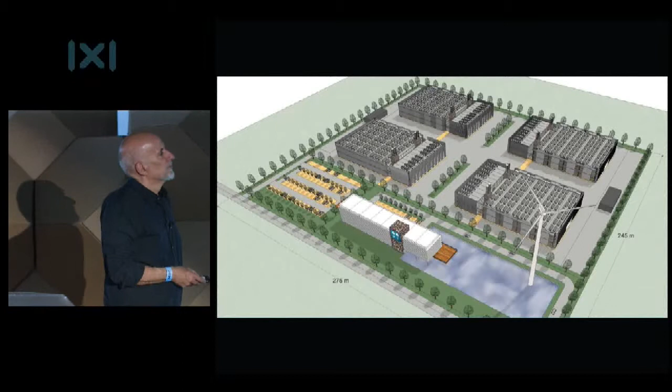This was the point of departure. That was the project made by Royal Haskoning, a Dutch design company. And this is a kind of common project - they are very used to doing projects for data centers. These are the IT buildings, 4, with 2 main levels, and the side spaces to give energy, let's say, to the main areas, and here the support building.

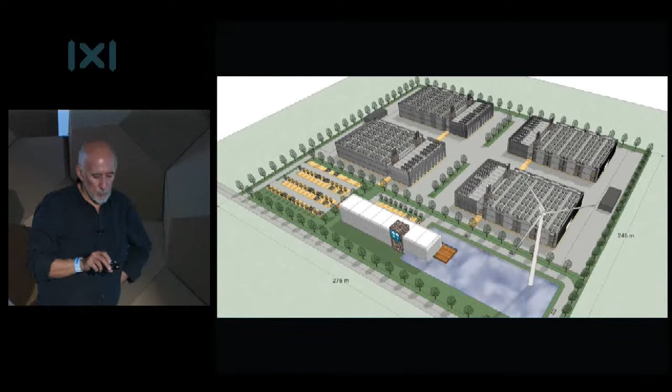This presentation of these first studies was very useful and very interesting for me, because from here I began to think about what I can do with this kind of brief, with this kind of program and the problems in the site that was given.

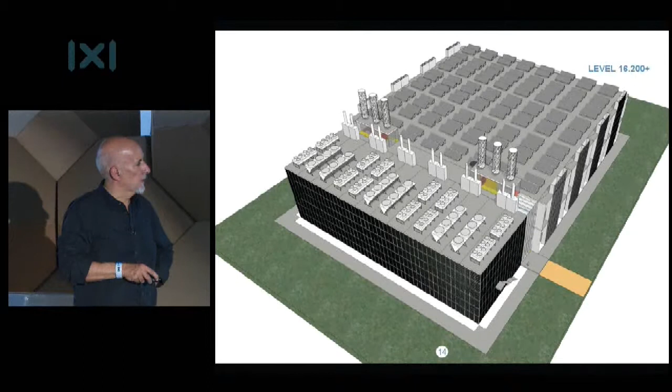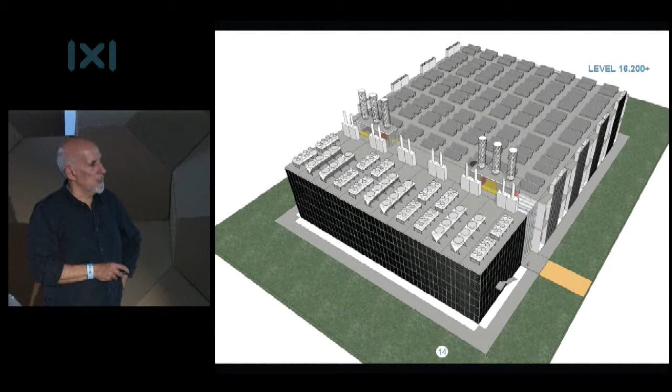You can imagine that we are not seeing things very interesting from the architectonic point of view, and they were aware of this, but this was a presentation. I was present in a workshop where they presented these studies to PT, and it was very, very useful for me.

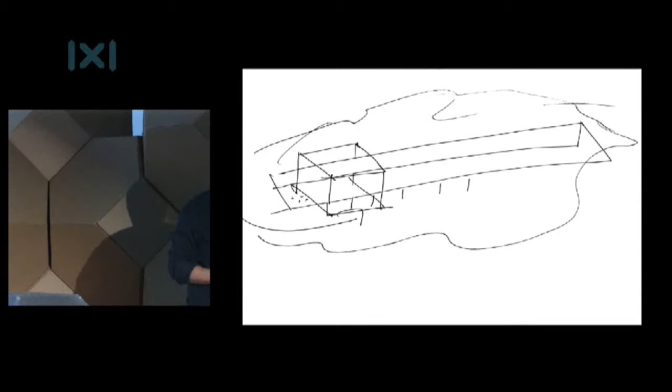I thought that it was interesting to imagine that the IT buildings were more compact than what you have seen. And I imagined several levels to create a kind of capacity that is always very economic.

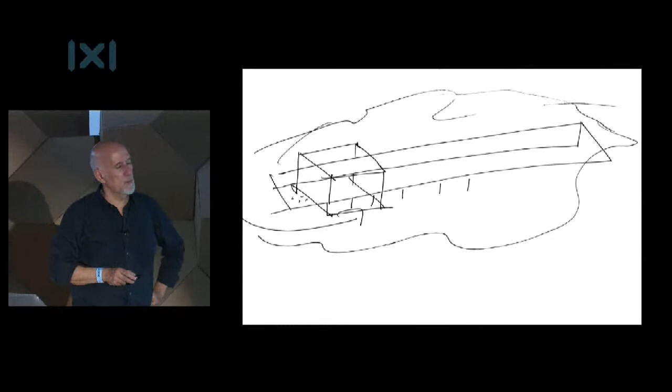And I thought that it was interesting to have the building directly built upon the earth, but to surround it with a very big area of water. The water is very important in this project.

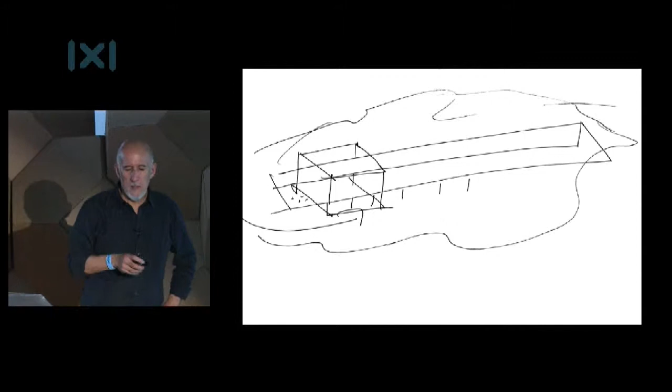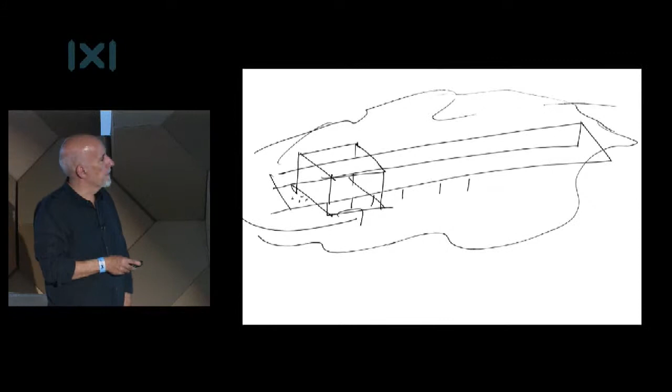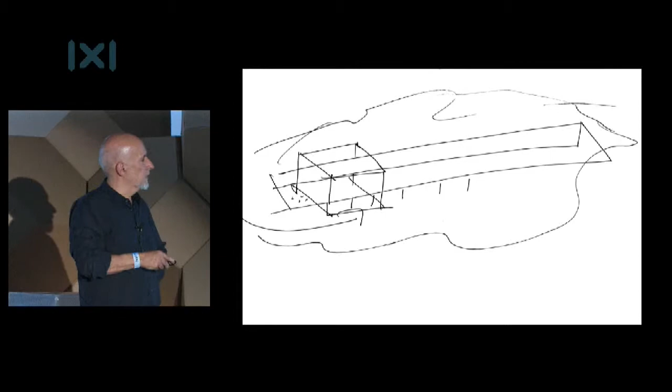The project for a data center is mainly a project for a system to create, in security, the access to a very great amount of energy, electric power, and after, inside the buildings, to dissipate the calories that are created by the work of the computers. And the water is very interesting and very useful because we use it for air conditioning and also to create a kind of interesting space that you are going to see a little bit.

So I thought that it was maybe possible to have this level of water surrounding the IT buildings that are built upon the earth, and then to have the office buildings with the view to the water and to the mountain.

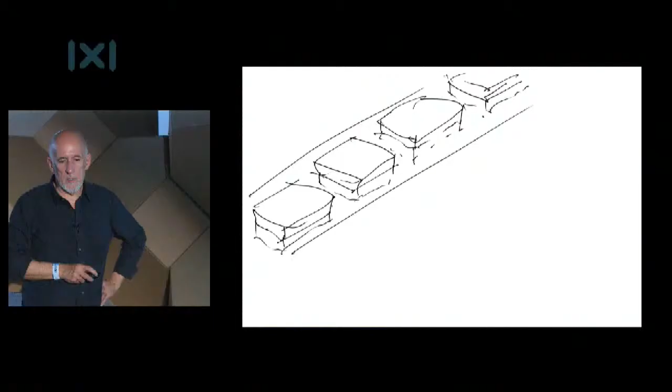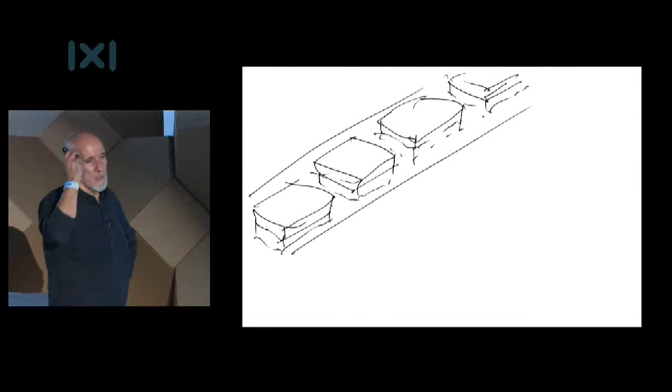And these were my first sketches on this project. I began to think that if I have the water and the building, the building is going to reflect on the water, and we can work with the dimensions we are creating and with the peculiar image that we create with the water and the apparent opposition between a very strong need of power and also the presence of water.

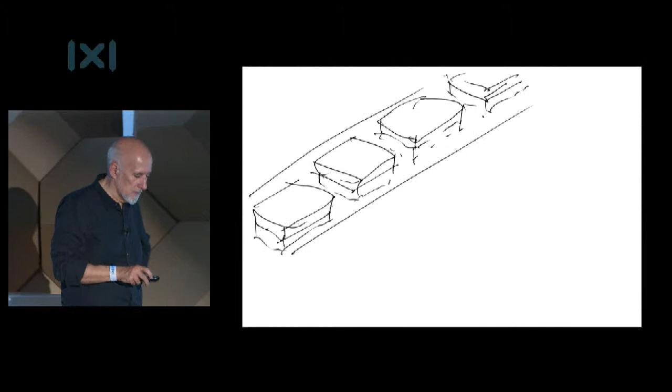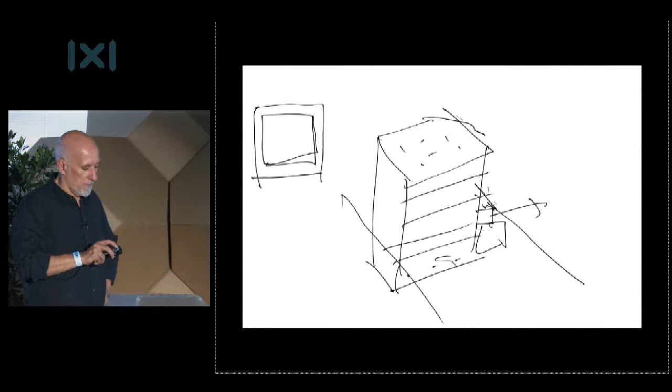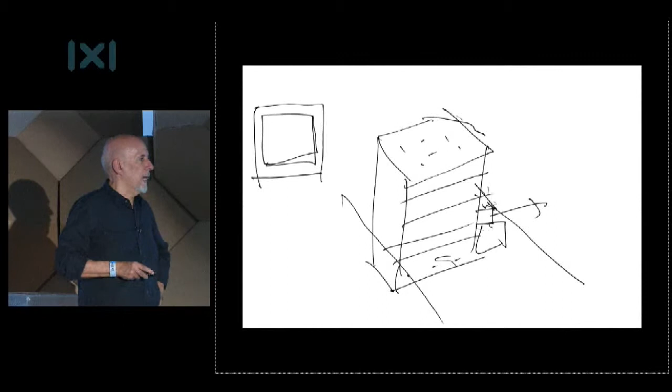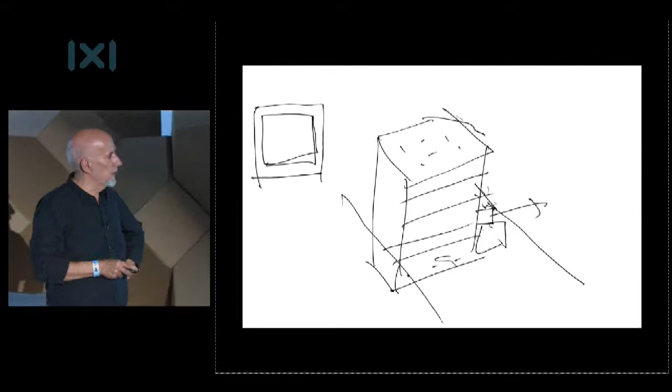This is another sketch, always thinking that we can have a kind of core inside, and then we can have spaces that work around this inner core. And the question that we have to have access very, very freely to let the air pass through the spaces that are overheated with the working computers.

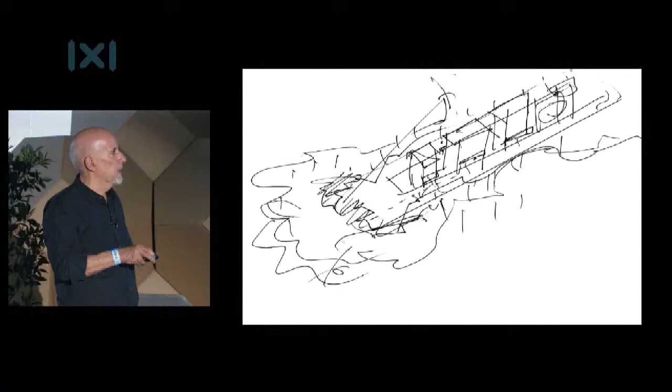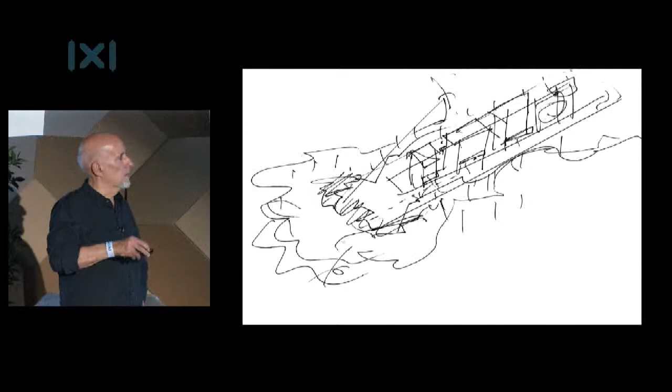This is a more complex sketch, but very near of the final result, where we can see the water around the 4 buildings. This is not easy - around the 4 buildings. Here a kind of indication of the position for the support building, for the offices, with view both to the trees that surround the building, the complex, and also to the mountain, and to the city, and of course to the water.

And this idea of having a very simple, let's say, result with simple buildings and everything that is complicated under the water.

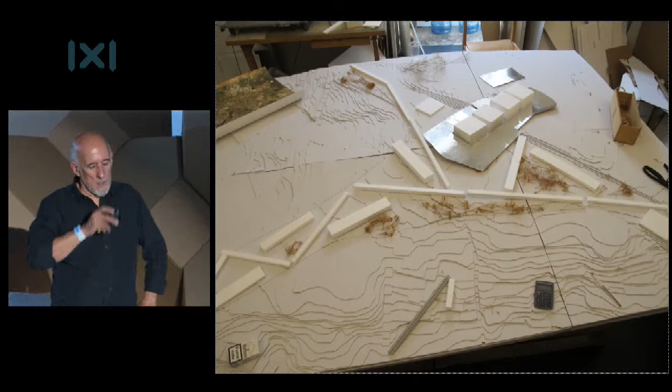This is one of the first models to try to understand what it could result with the space of the little airport and the other spaces around, and the complex here with the view to the mountain.

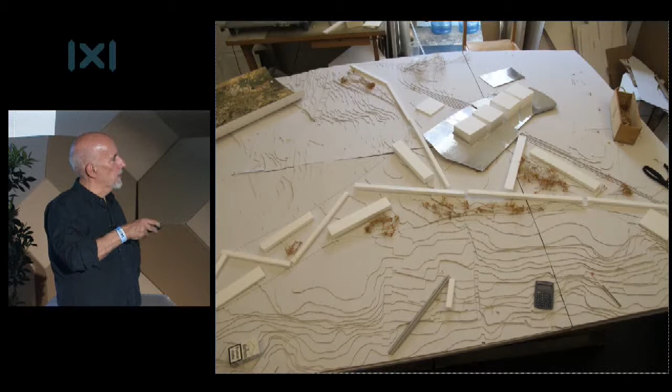I work very often with this kind of models that are not at all precise, but where I put everything I have around to try to - this is the road and the other buildings that we have to consider, like a hotel, research buildings, universities, things like that. And everything inside a kind of green park that surrounds all this space and occupies the space of the little airport.

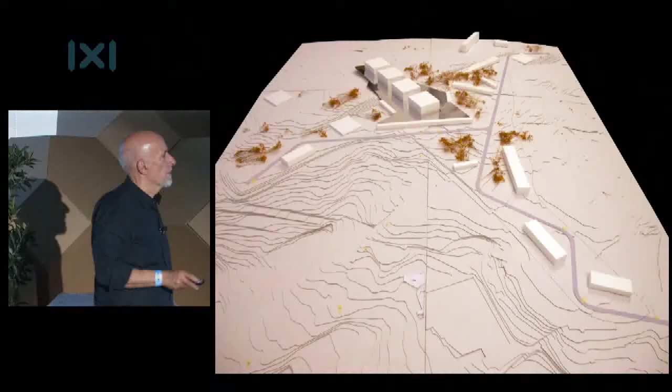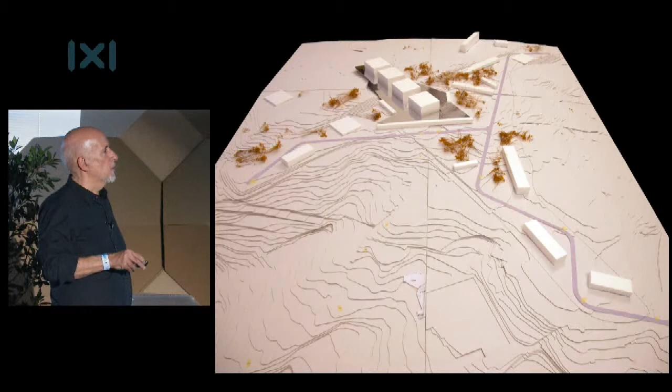This is another version of the first model. Here we see more linear the space of the offices that changed after. The trees that seems to be very useful in this space to create this kind of campus atmosphere with a very big concentration.

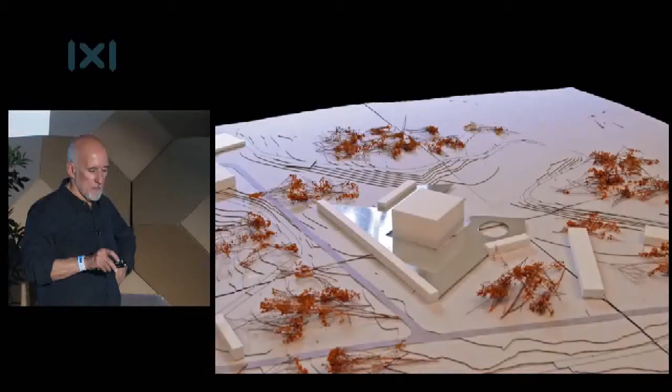This is a prefiguration of the first module. If we only build the support building and only one of the buildings, to understand that is the situation now. Now we have more or less this with the different form. But we were trying to evaluate if the result was possible, and it was considered possible because we create a kind of facade towards the entrance, and we can after go on in this direction, like this, with 2 modules, or 3, or 4.

We thought from the beginning that it was interesting to have a system, a metallic system that allows the air to pass in a great volume and speed. And we researched for some possible references.

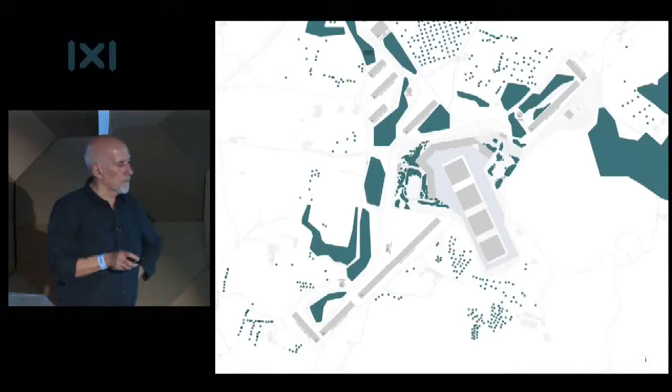This is a photo montage with the building, the area of the airport, and the area that is considered to study around this space. In green you see the water. The office building and the water.

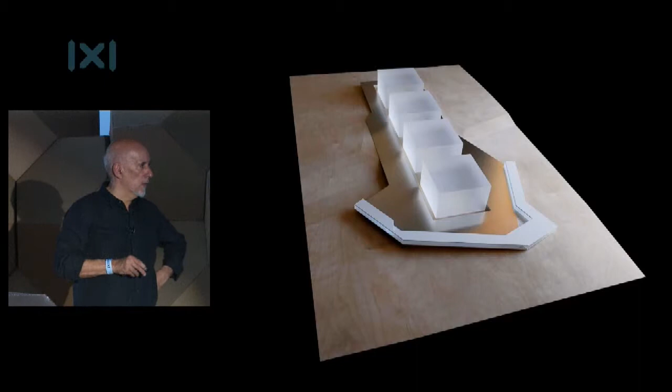This model is much more precise. The dimensions are very similar to the result. We have 55 meters a square, and the height from here to the water is 27 meters, more or less. So when we have the reflection on the water, we have a cubic form.

This is not so important, but for us is a kind of reference. And then we can see the office building that looks to the mountain and the city, and also to the water. Here is the entrance we are going to see with more detail.

Another photograph of the same model. Under the water, we have a kind of factory ambience, and the trucks goes and can circulate around the technical buildings.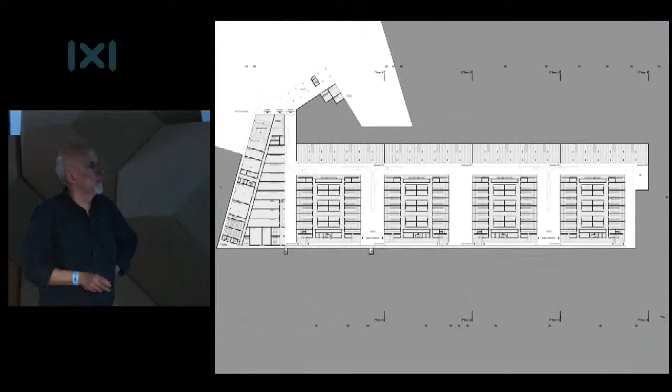And here you have an image of the ground level under the water with these - how can I say - generators, electricity generators, and lots of technical devices and the technical spaces, the technical entrance, and then the trucks circulate in this area, and we are always under the water.

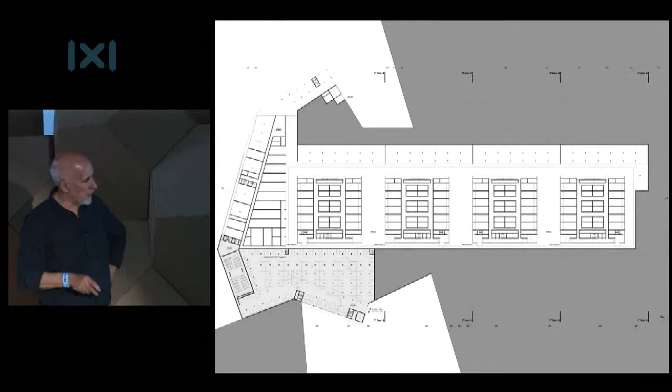More or less the same level, but with the parking area, with the entrance from here. And this is one of the standard levels with the entrance. You have a view to the water and to the building.

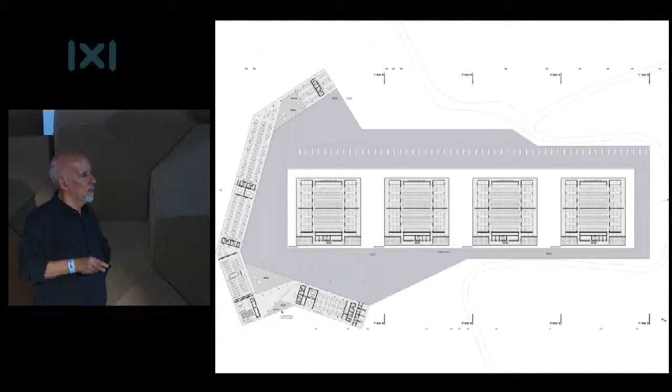You have the office areas, both sides. And here you have the technical buildings with the core, with the computers, the IT rooms.

What I tried to add to the project that we have seen before is to incorporate the site and the possibilities that the site was giving us in a climatic sense, and atmosphere, views, etc.

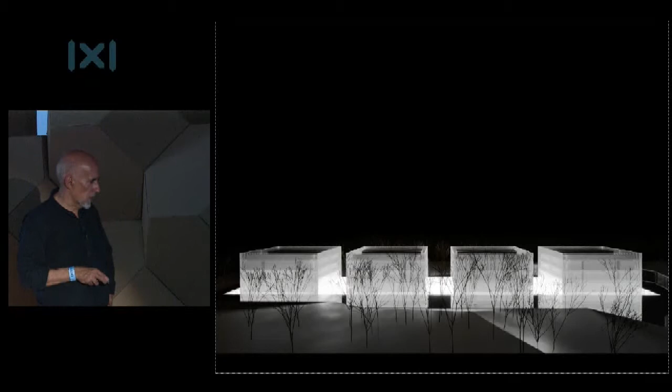This is another model, more detailed, with the water and the reflection of the technical buildings. This is a...

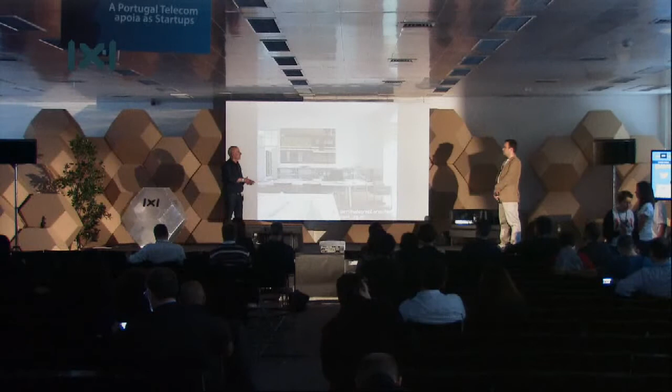So what has been the national, international feedback regarding the data center architecture specifically? During the design and the construction, I have not very much shown the project because they wanted a certain confidentiality. And now that it is inaugurated very recently, we are waiting for next week to do the first good photographs and to begin publishing the building.

For the architects, the reception is always very good because we like to introduce a kind of humanity in these very huge and difficult briefs. And for me, it was very interesting. I think it's going to be a success in this point of view because the working spaces are very interesting, very agreeable. And also from the point of view of the economy of energy and the functionality of the main technical buildings, it's very good because we concentrated very much, but we created the best design to have an incredible economy and security.

Thank you. I think we are pretty much done, so I would like to thank Architect Carrilho for your wonderful presentation. It was a pleasure. Thank you very much.